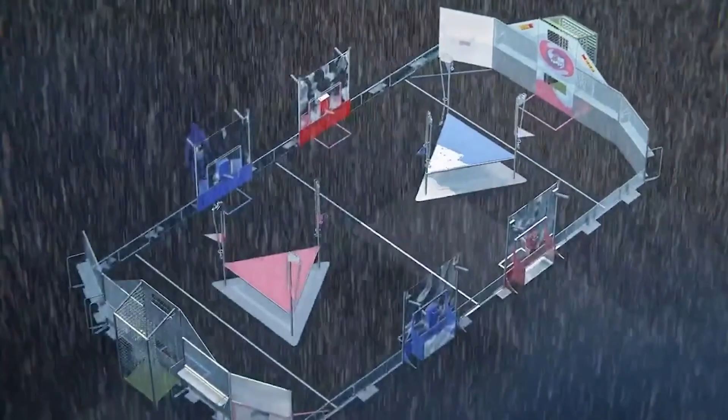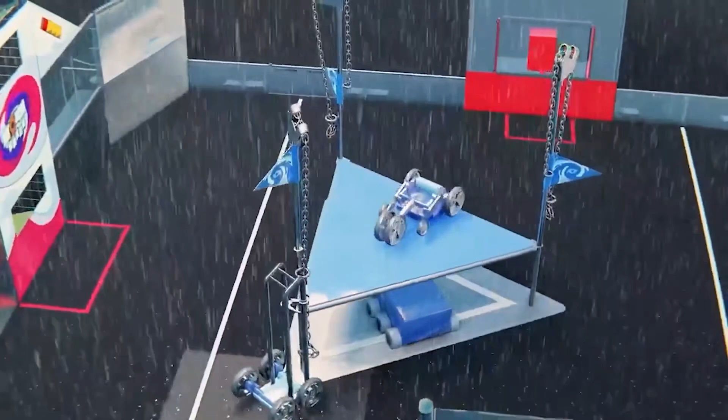Welcome to Storm Surge. As a dangerous hurricane approaches First City, robots in a remote base must race to upload crucial weather data before the storm hits. Alliances of 3 robots each place data packets onto the memory caches and shoot data packets into the data ports, uplinking to the cloud at the end of the match to send the remaining data to First City. Robots start on the charging line opposite of their driver's station, preloaded with 1 data packet.

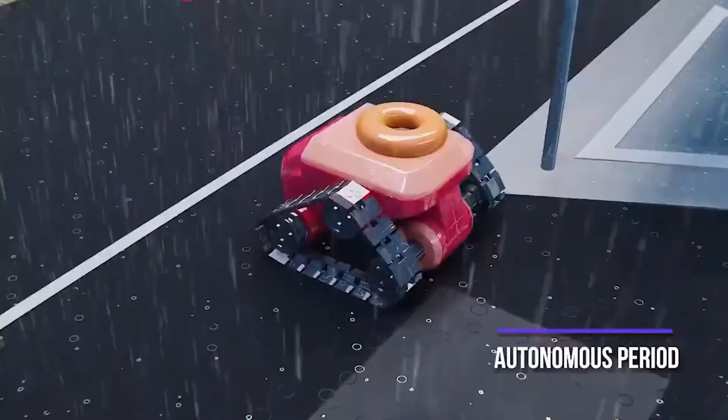Due to the intensity of the storm, robots cannot communicate with drivers and must operate autonomously for the first 15 seconds of the match to score data packets into the high and low data ports and queue data on the memory caches for increased scoring bonuses. For the remaining 2 minutes and 15 seconds of the match, the worst of the storm has passed the island, allowing drivers to control their robots in the teleoperated portion of the match.

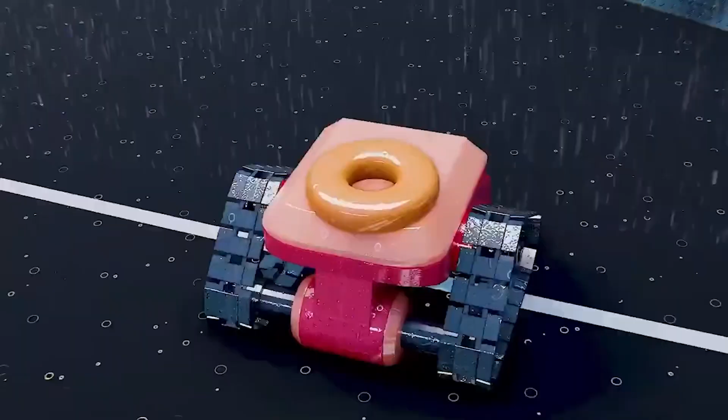Data packets can be retrieved from the transfer stations adjacent to the driver stations and then placed on one of 2 memory caches matching the Alliance's color, or scored in the high and low data ports. Data packets placed in the memory cache will reward additional point bonuses for the next data packet scored in the data port. Alliances will be awarded 1 ranking point for uploading a specified number of data packets to First City.

Near the end of the match, robots will race to their upload stations to send a final wave of data before the storm hits. Alliances gain points by parking at the upload station and will be awarded additional points by uplinking to First City using the uplinks. The Alliance with the highest score at the end of the match wins. Storm into action in Storm Surge.

Hi, everybody, and welcome to the 1678 Storm Surge CADathon presented on First Updates Now. We have some awesome designs created to tackle the Storm Surge Challenge, and we can't wait to show them off to you. From Team 1678 Citrus Circuits, I'm Dave Powers. As many of you have seen in the introduction, Storm Surge was one of the 2021 Game Design Challenge winners. And to help talk about the submissions, we have 2 of the judges from the Storm Surge CADathon joining us, who are both students on 1678.

Elie and Brendan, you want to say hi? Hi, my name's Elie, and this is my 4th year on Citrus Circuits. I'm currently the strategy lead, and I've been working on design for 3 years. I'm Brendan. I am a 2nd-year member on Citrus Circuits. I'm a design and strategy student. All right, awesome. Thanks, Elie and Brendan, for coming out and being on with us.

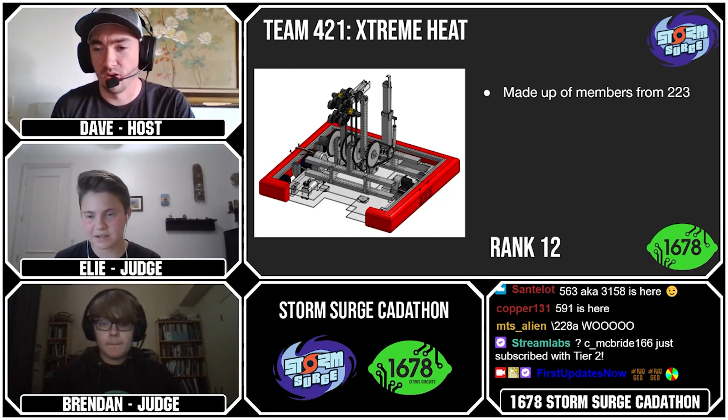All right, so we have 12 fantastic entries to go over. All of them are very capable of playing the Storm Surge game. So let's start off with our number 12 rank. All right, so 421. 421's robot had a pretty interesting design. It was an interesting concept that when we were kind of thinking about the game, none of us really thought of this design. So it was kind of cool to see.

There were a couple of things that we thought would actually pop up as a little bit of an issue. The main thing being the claw roller, which was very reminiscent of a 2011 roller claw. The 4-bar arm looked pretty good, but the roller claw itself looked like it would probably need a little bit of modification to actually pop up the game piece and be able to intake it as well as deposit it.

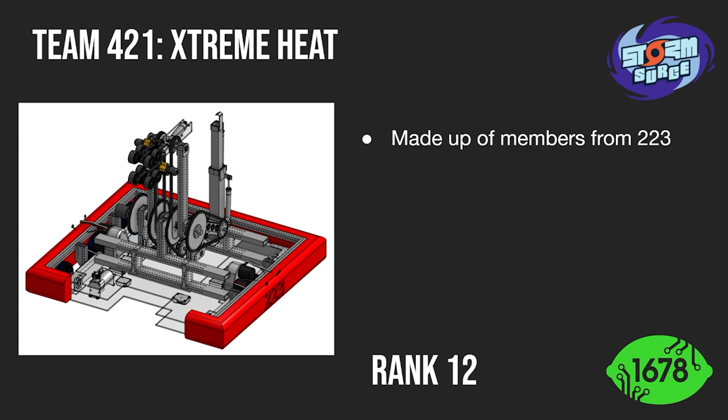Also, there were a few details missing from the CAD that we probably would have liked to see, as well as the climber mechanism itself kind of looked a little wishy-washy. The design was laid out to be able to grab onto the platform and the whole robot would flip over. So we thought that was kind of a little bit of a reach.

But other than that, awesome job to Team 421. You all did an incredible job, and it was really awesome to see your submissions. So thank you. Yeah. All right. So yeah, really good job, Team 421.

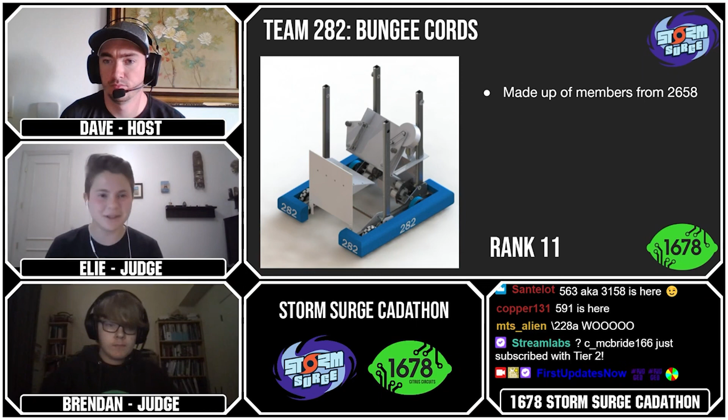So let's move to our rank 11 team. Okay, so nice job, Team 282, the bungee cords. Really liked your design. It was super cool. You had a lot of good elements, and I liked how you incorporated stuff from past FRC games, specifically the 2019 HAB climb and 2013 kind of shooter that you can see there in the center.

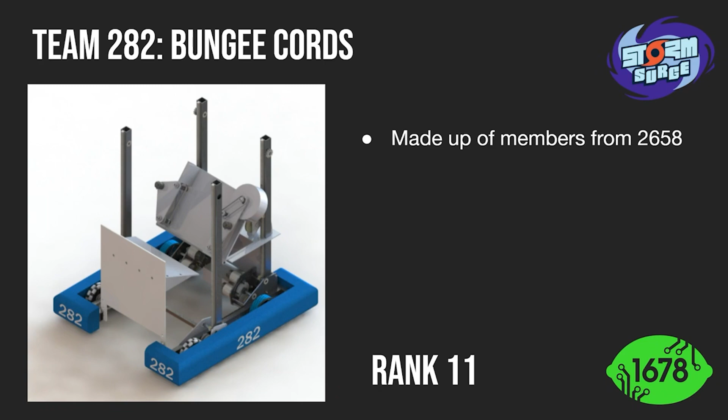And then I thought your use of the shooter, as well as your grabbing mechanism, you can't really see in the picture there, but it's pretty cool to grab the discs and put them on the cache. That was a really good idea to separate those different tasks. One of the major problems we saw with this robot was just interference and lack of certain details that we'd expect to see in a robot. So things like a belly pan and other general things that you typically see in a robot were missing.

But overall, really nice job, guys. I liked how easy everything is to manufacture, and you can definitely see how to make all of these different components, and your submission really outlined how you can make each different component and then put it together, which is always really great when making a robot.

Yeah, I think with this one, we would like to see a little bit more detail in the CAD. It looked a little thrown together. It was a little reminiscent of the OG Crayola CAD stuff that we do really early in the season. So we probably would have liked to see a little bit more detail, but overall, the feasibility and the concept looked really good.

Yep. All right, so moving on, we have rank number 10. Give it up for Team 117. So this was admittedly one of my favorite robots, just because it was very reminiscent of a 2013 robot, particularly the 2013 robot that I was a part of. So it reminded me of some really good times. And the fact that it was designed by just a single person on a team is really impressive. So awesome job to whoever did that. It's really crazy that you were able to pull that off in a short amount of time.

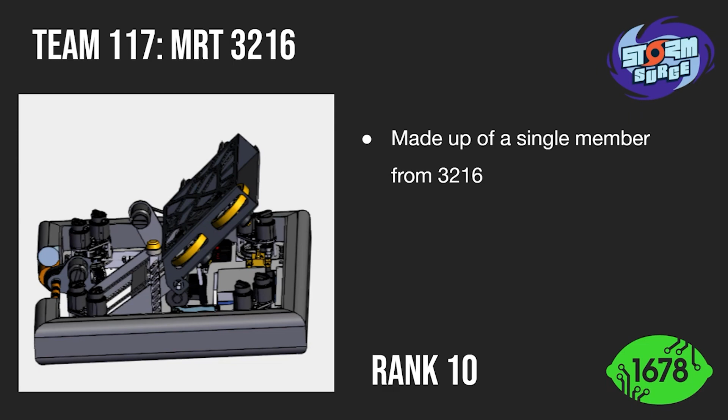So, like I said, there were a couple small things that took away from the score, like just detail oriented and some slightly questionable design choices, and then an end game mechanism would have been something cool. But other than that, I think this robot was really cool to see, and I enjoyed seeing the concept come together.

I also really think a cool thing that we saw with this robot was just how the actual shooter worked. It was just really simple, but also everything worked well in the CAD. It was all really clean, and it was clear that effort had been put in, and it had also been done just with good design in mind.

Yeah, just to elaborate a little bit more, I think the one main thing that I saw that probably took away from the score a little bit was that shooter was one giant piece of sheet metal. I worked with sheet metal for a long time, and I know if somebody gave me that, I would probably cry. So I think if that design was a little bit more thought out and breaking it up into either two separate pieces or some C channels on the end with some top and bottom plates, that probably would have gone a long way. It would have been cool to see it on a swerve drive, I think, for sure.

I think that this thing would have done really well. I think that I enjoyed it. The swerve drive probably would have added a lot to this team's ability. Cool. So I think we can move on. So we got rank number 9.

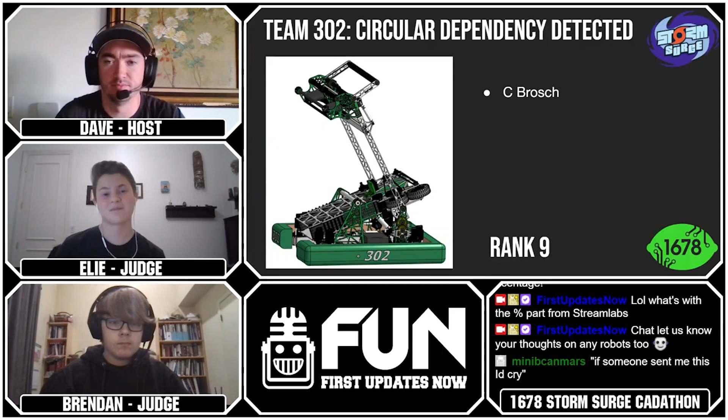Yeah, so this was Team 302, circular dependency detected. So this was actually a really nice robot. It was designed really well. The belts on the side of the shooter, which is how it brings the donuts up, is a really nice way. It's executed cleanly. The side wheels for shooting are also great. It's the straightforward way to generate spin on the game piece, which is what we had to see in 2013. And the belt setup on all of that is clean.

There's no interference. The belly pan on this robot's actually done really well too. There's a really clear wiring path. You don't even have to be really an expert in electrical to really understand that, yeah, this could work and I could probably do it if I had to. The main issue that we actually found with this robot was just that the intake was mounted in kind of a way that we were worried that it might bend.

So in a situation like this, when you're trying to have the intake extend that long, it would be probably better if you push the pivot point up on the robot instead of having it extend from all the way back there, because in Storm Surge what we're expecting to see, or if this was actually played, is a really high defense count. And what we were worried with this bot is that if someone hit the intake or nudged it or hit the robot when it was doing something with the intake, it could run the risk of having to bend or have the metal inside torque or something, and we really didn't want to see that.

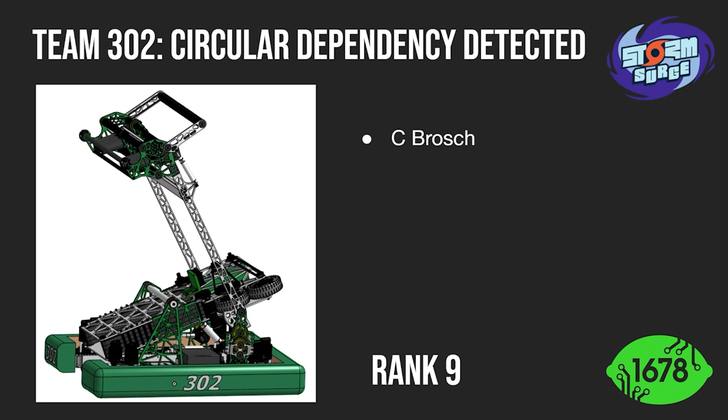And then the other main issue we saw with this was the way that the chain was wrapped up was with chain spools, and that's a really clever way to use COTS parts to make it so that you don't have to spend a lot of money on this. It does run the risk of the fact that that is basically a bunch of metal spikes spinning, which, while cool, doesn't exactly follow the spirit of FIRST, and I believe it starts hitting some conflicts in section R of the rules.

Yeah. So I think I really like this design. I think that you can look at this main picture right here, and the thing that screams at me when I look at something like this is those two long, very thin arms with the entire mechanism up top. That does not scream rigidity. So I think that if you come up with a way to make that a lot more rigid and a lot more consistent, it probably would have gone a long way into making this robot something that's a lot more feasible and something that would last in the competition.

That was a big thing that we were looking at with all of these submissions: not only how can you keep it simple, how can you keep the cost down, how can you manufacture something? Is there anything that you can make that anybody can make with a small number of tools that any shop can have, like a small router and a lathe? And then will it last in the competition? That's always a huge thing.

Something that we've learned over the years is you just need to be able to go out and know that it's going to work consistently, and you're going to get some hard hits. There's going to be a lot of defense, especially if the robot performs very well. You kind of end up with a little bit of a target on your back, and then with that intake coming down and being outside of the frame perimeter, you're really exposing it to a lot of potential warpage and bending from other teams. So I would almost guarantee that that would probably be an issue in the season.

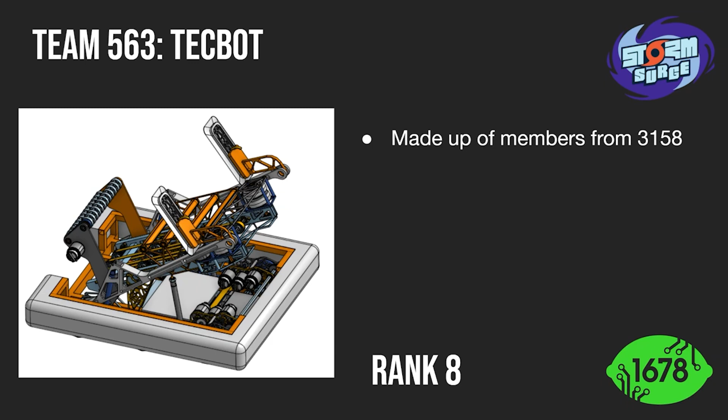But other than that, this team did a really nice job. The gearboxes were beautiful. Maybe I would have just thrown a COTS gearbox in there because it works consistently, but those are relatively simple nowadays. So that all looked good. There was a small bit of conflicting parts between the mechanisms that kind of detracted from the score a little bit. But other than that, I think this team did an awesome job putting together this robot. And again, I keep saying it, but it still blows my mind that all of these teams were able to do this in just a week. So awesome job to Team 563.

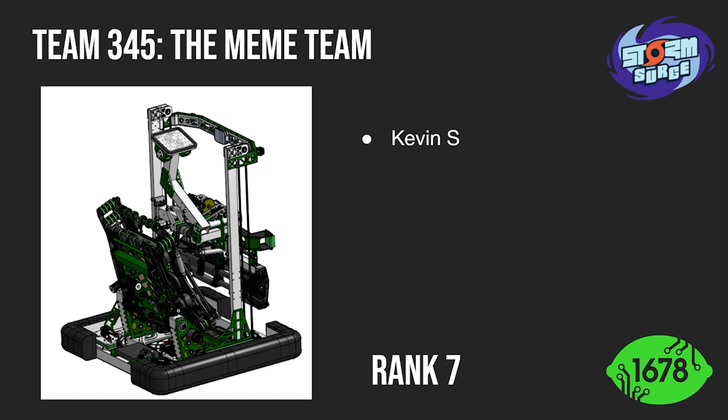So our next robot is rank 7, Team 345, the meme team. This one was really well done, really, really thorough. You can see there all of the different parts of the robot. There's a mechanism for every part of this game, which was really cool to see. We really liked how in-depth everything was. The submission also included a really broad list of all of the parts that you're going to need to build this robot and how to do that, which was really cool to see.

Again, like Dave was saying in the previous robot, we see a suction climb, which kind of detracts somewhat from the overall score in general, because these were just really hard to make well. And if they were made well, then they'd be really expensive from the 2019 game. So though they are super cool, especially with that heavy of a robot, it would have been pretty hard to make. But other than that, the climb was really cool and really detailed.

You can see there the main part of the robot is mostly the shooter. And you can see those side panels to shoot the discs out would have been really great. There was a bit of an issue with the top rollers. We expect that if these are all going at the same time, then the discs would kind of tumble out instead of actually being shot out, which is not exactly what we're looking for when you're going to try to shoot discs, or one of the donuts. So that was a little bit of a problem, but other than that, this was super well done.

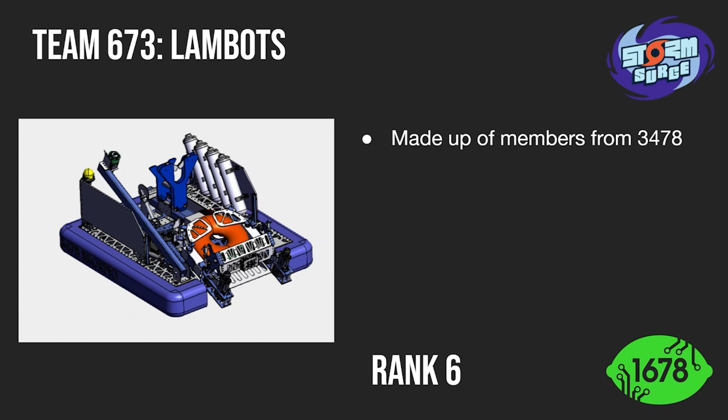The only main issue we had with this was structural integrity. So a lot of the ways that stuff was mounted, for example, the chain puller and then the arm grabber, was a little problematic. The shafts didn't look too tightly secured, and then also there were issues where it was a pretty thin plate holding this massive arm,

which didn't really seem like it would work too well, especially because the arm was going to be moving around a lot, rotating, going up and down, which made it a lot harder for us to think that it would be structurally sound, especially during a match when defense is going to get played a lot.

Something to add, I think this robot and a couple other robots we saw, one of the main things in this game in Storm Surge is using that height. So the bottom of the end game structure could be a real advantage if you made a robot smaller than that to be able to fit under there, and it makes your robot paths a lot faster, or can really help you with lining up for shooting or whatever that may be.

Seeing robots like this being able to compress all of their main elements into that small space was really cool to see. Just adding that additional challenge to the CAD to make your robots fit under there. So good job, Team 673.

I just got to say the climber, cool. I love that concept. I think it'd be cool to see it with a little more structural integrity added to it. It would be something that could work relatively consistently and be deployed and actuated in a very small amount of time. So that was something that stuck out to me.

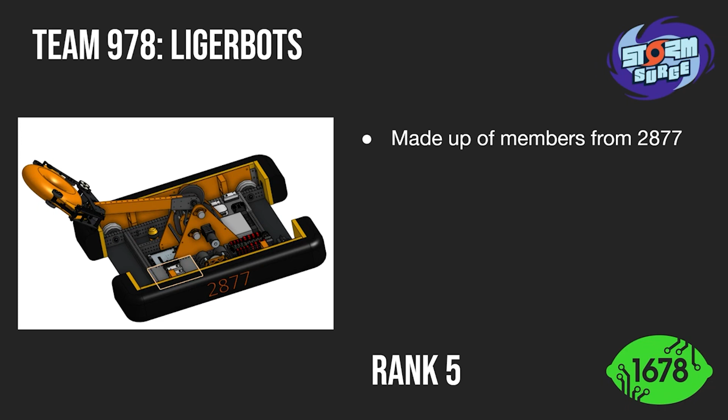Yeah, I mean, I love the simplicity. That's what it comes down to, right? I'm a simplistic guy, and I love a robot that you can build really quickly and do a ton of driver practice on. It kind of reminded me of a 2019 2910. They would probably be able to rip around the field and score a bunch of game points, and they understood that you're probably going to lose a little bit of ability in the short term, but in the long run, you can really optimize to do those few tasks really, really well. And I could see this being the ultimate third pick for a team that would make it really far. So awesome job to them.

Okay, go ahead. Sorry, I didn't mean to cut you off. Oh yeah, no. And also just one other thing is this has a really cool way of actually keeping track of where this is at. There are actually 3 absolute encoders on that arm, which is really cool because it gives a really precise way of knowing exactly where relative to your robot the arm is, which is really nice, especially in this game where placing is really precise.

Awesome. Okay, moving on to rank number 4. Who's it going to be? All right, we're getting up there, guys. Nice job, Team 591 KnightVision. This was really cool, especially for one person to design. Really, really impressive. This also, similar to other robots we've been looking at, incorporated a lot of things that we've seen proven to work in the past.

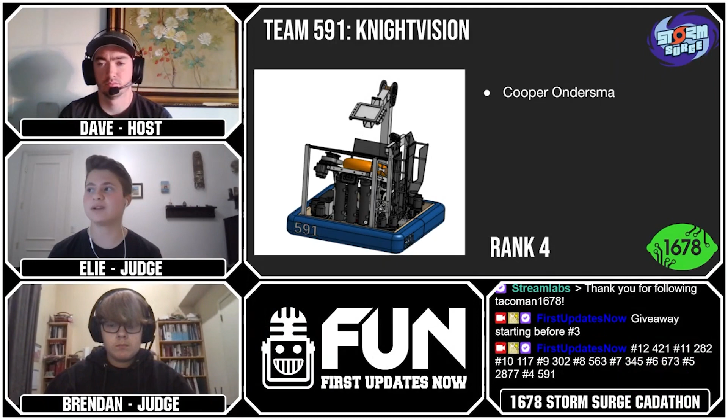So again, that 2019 kind of suction climb, as well as the 2013 shooter, and as you can see there on the side, a box tubing elevator, which you can just put a donut in, raise it up, and place it on. Really simple and straightforward way to tackle the cache. So that was really cool. And just seeing that all integrated together, something that stood out to us with this robot was how easy it is to manufacture all of these parts. We can really see these being made at any shop, other than, of course, that suction cup. It is mostly mill and router parts that we see there, as well as some lathe parts, which is all very standard for a typical shop. And just nice integration of everything. Your use of the elevator for the cache, and also that standard shooter, looked really good, and they definitely work in a game.

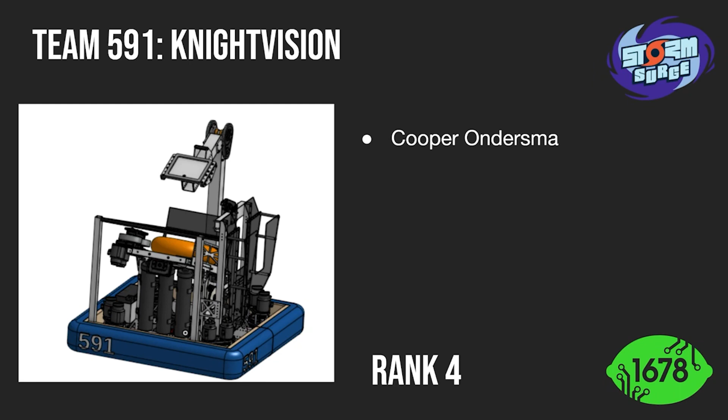Yeah, I think the big thing for me was the CAD on this robot was really well done all the way through. It was consistent. It was something that you could just start making the parts and build, which was really important to us. Some people are probably like, "There's a lot more robots that look a lot crazier," but for us, it's the simple robots that you can actually just start making. You can start making prints, and you can start making parts, as quickly as possible. This looked like a robot that, if you did the CAD week 1, you could start building it week 2, and week 3 you get a robot, and then you do driver practice the rest of it.

So you sacrifice a little bit of end time ability, but you really give yourself the ability to focus in on all of those small things that you can do really consistently. So awesome job. The suction climber, we were hitting on it a little bit earlier. That did detract from the score a little bit for feasibility, but other than that, awesome job. I like this one a lot.

Yeah. And another reason this one ranked really high is because even with its comparatively small overall design, it still has the ability to do basically every robot action in the game, which would be very beneficial within an actual game, to be that team that could take on any role during the match. So that was really cool to see as well. Yep, that was very important to us.

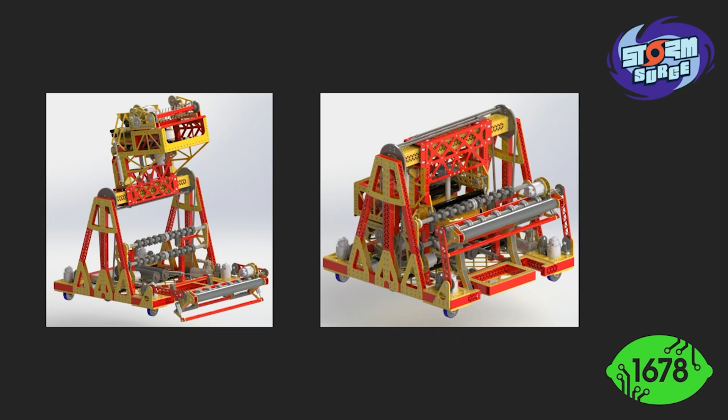As you can see here, there's a ground intake. So what happens here is the ground intake happens, and then that goes into an indexer. And then as you can see in the right-hand image, the shooter rotates all the way down to pick up the donut and then swing back up so it can shoot. That's honestly just a really cool way of doing it, if not really complex. And I do think that deserves some rewards just because it is such a really cool design.

This robot is also capable of doing almost every single action in the game, if not all of them. It can compress down and go under the uplink, as you saw, and it also has the ability to shoot in both the low and high goals, and it can also place by rotating the shooter so that it's facing perpendicular to the side of the uplink, and then it can just slide it on using pistons, the little yellow triangles you can see in the image.

So it was a really cool robot that could do every action in the game really well and looked really cool, if a little more complicated than we were looking for.

The Meccano robot. I hope you don't get a copyright strike. But this thing was unbelievably detailed, down to the last little piece. Everything was CADed out. The whole A-frame uprights maybe scared me a little bit with that whole giant mechanism. That thing's going to be really heavy. So maybe finding a way to make that beam a little bit more rigid. But other than that, the complexity of the design probably scared me a little bit.

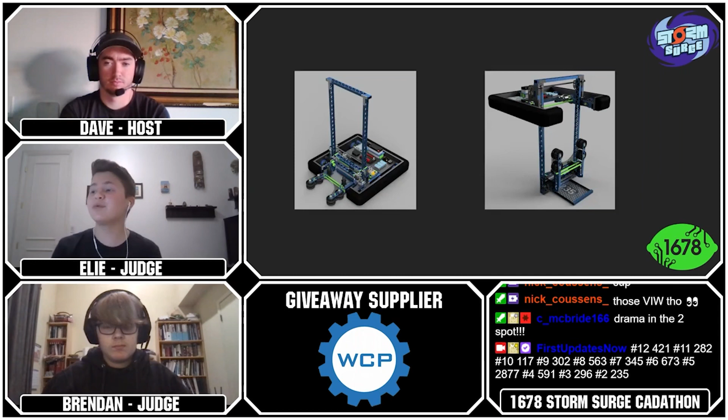Just looking at that CAD, you can see that most of the parts can be manufactured pretty easily, and this robot would definitely be able to be built within that eight-week build season period. So really nice job incorporating all of this and making such a simplistic CAD that anyone can really follow.

Another really cool thing that you can see is its climb, which was awesome. We've actually seen other robots do similar climbs in the past, but it's still super impressive to look at. The entire robot being lifted off of that one metal piece at the bottom, and then driving forward on that to lift itself onto that middle structure was such a good idea. Just using that from past years' games.

And overall, this was super well done. The CAD was well made and put together. And it had basically everything that we are hoping for a high-level robot to do. Yes, there were a couple things that this robot missed. This robot didn't include every element that you could have. I believe it was still too tall to go under the end game structure, which was somewhat unfortunate.

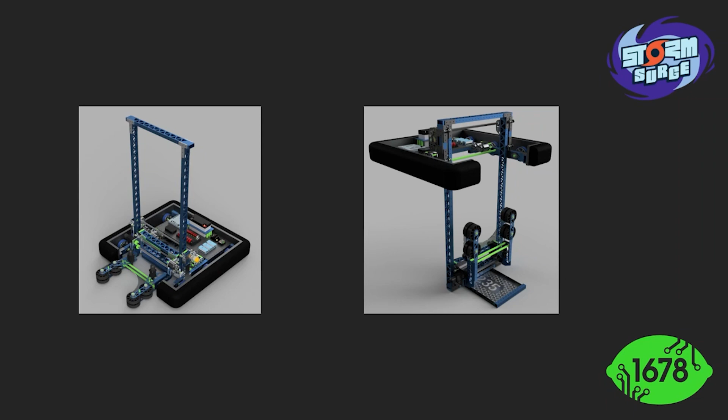And it had a couple other things that it probably couldn't do very well, such as, I think this team claimed that they could shoot, but looking at the CAD, it probably couldn't, given that there's just not enough space for it to do that effectively. But overall, just having a placing robot would still be really effective for this game. And it was really good to see.

Yeah, I think the big thing for this robot with me was you probably have to do a little bit of work to make the climb work. I think that maybe the battery being all the way out at the end would probably make it topple over. But we've seen some crazy platform robots that can lift the whole robot up, and there are definitely ways to make it happen by tricking the physics a little bit, so to speak. So I think that might have been a little bit of an issue. But other than that,

this robot was very, very clean. The CAD was completely clean. Like I said earlier, you could just take this CAD, send it off to the manufacturing students, and they can make it. We could probably make it in-house in a few days. How could you beat that? I just think the team did a really good job of trying to think as simple as possible and make something that could do as many elements of the game while only having a small number of mechanisms.

I understand that the shooting is probably a little controversial, but I think maybe it just has a little piston that pushes it into the shooter wheel and it might go. It would probably take a lot of prototyping to determine the 2-wheel versus a 1-wheel shooter, so you get some rotation action. It's really hard to tell how the shooters would work and how the physics would work without actually being able to do some prototypes.

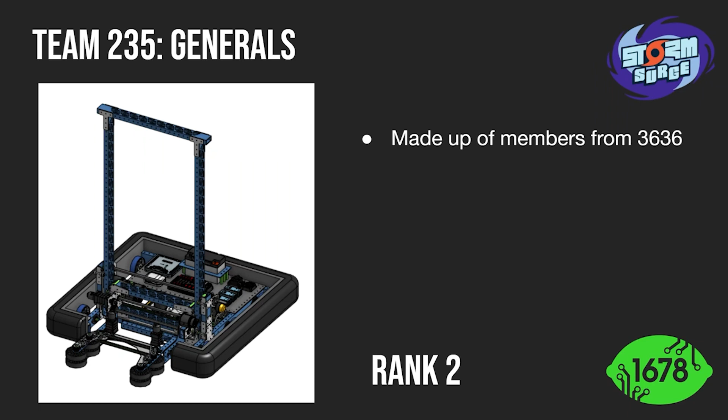This robot pretty much embodied everything that we were looking for in this design challenge. I will say, if you read the rules carefully, you would see that we really structured this design challenge to try and build a simple, well-executed robot that any team could make, and they can make it in-house cheaply with resources that could be obtainable by anybody. This robot hit all of those marks.

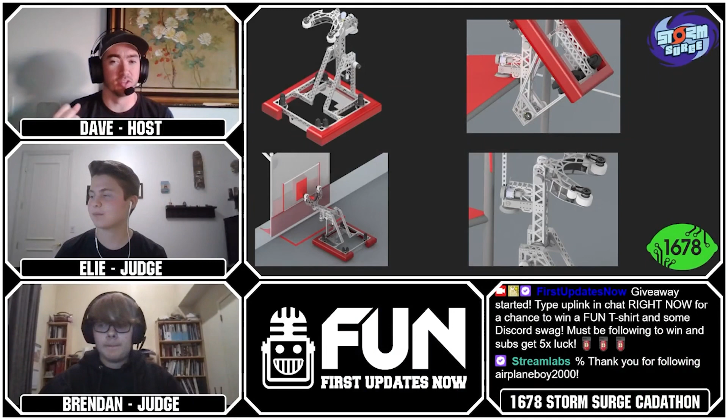They really did a great job making a mechanism. Their multi-use arm was able to do a bunch of different pieces of the challenge without sacrificing anything really large. So they were able to consistently pick up the game pieces, score them, do the uplink, and use the climb. The suction climb, I'm going to give it to them, the arm looked beefy enough that I think they could make it happen.

I was trying to do a little bit of math to figure out what kind of ratios you would need to actually make it flip up and over, and it looked like it would be obtainable. You'd probably need to do a little tweaking of the suction cup itself, but it really looked like something any team could make that would go on to win any district and most regional events. That was what we were looking for: that robot anybody can make that would really stand out and be as simple as possible.

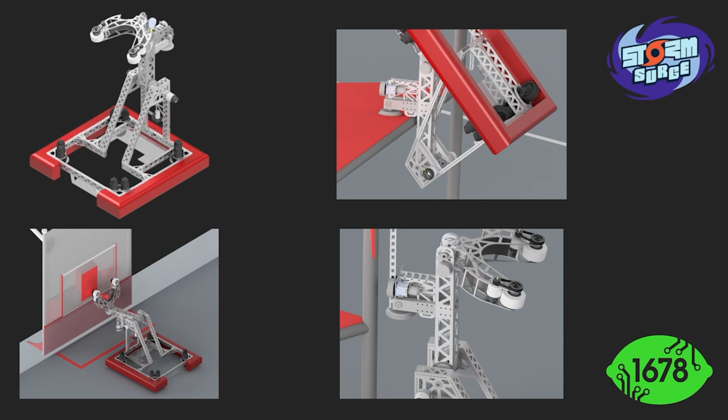This team also did a really great job with their submission. It's hard to emphasize how detailed it was. The robot was very well detailed out, they did the math for all of the different motors, they talked about each mechanism and the trade-offs they were making, which was really important to us. When we were trying to make something simple, we wanted to understand what you're giving up. They had a really thought-out design. It was something we could just take and make, and it would play the game really well. So it was kind of hard to beat.

The entire robot cost was really low. Their BOM was pretty detailed, so they could go through and talk about what COTS parts they were using, and there were a lot of COTS parts to bring down that cost and make it simpler. Their manufacturing requirements were really low, and the robot could be made pretty much using only a 3D printer, CNC mill, a lathe, and a router with a sheet metal bender. So it's kind of hard to beat that.

They also talked about actually assembling the robot, how you would put it together in separate mechanisms, and the whole thing would come together as a sandwich. So they thought through every detail of putting this thing together, and it was incredibly impressive. When we were looking through all the submissions, it immediately stood out to me, and I was not disappointed. So awesome job to team 348.

Yeah, I think all of us were so impressed by this robot. It really stressed using that one arm to do everything, which we all thought was super cool. You can see how versatile it is in all of those different images, how much it can do. We definitely liked seeing that it had an uplink mechanism in addition to all the different things, and it was also a relatively short robot that could just zoom underneath those structures.